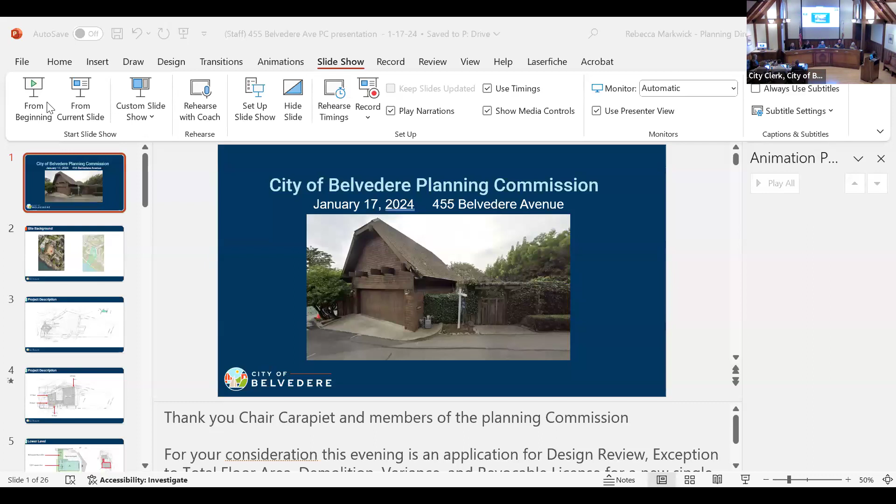Moving on to our next project, 455 Belvedere. May we please have a staff report?

Thank you again, Chair Carapiet and members of the Planning Commission. For your consideration this evening is an application for design review, exception to total floor area, demolition, variance, and revocable license for a single-family residence and attached garage at 455 Belvedere Avenue.

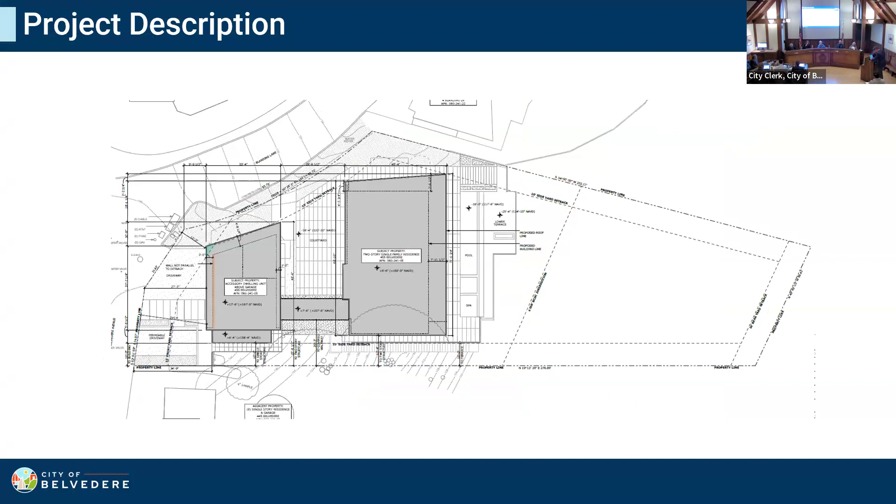The subject property is a 22,000 square foot parcel at the intersection of Belvedere Avenue, Beach Road, and Blanding Lane. In 2016, the site received approvals to demolish the existing residence, pool, and pool house. A detached 1,011 square foot, two-level garage and studio remain on the site along Belvedere Avenue. The project would demolish the existing garage and studio and construct a 5,035 square foot, three-level residence.

The residence would be divided into two pavilions connected by a sky bridge. The garage would be set back 29 feet from Belvedere Avenue and taper down to 12 feet 3 inches from the front setback at Blanding Lane. The residence would be set back 10 feet from both side yards and over 60 feet from the rear property line.

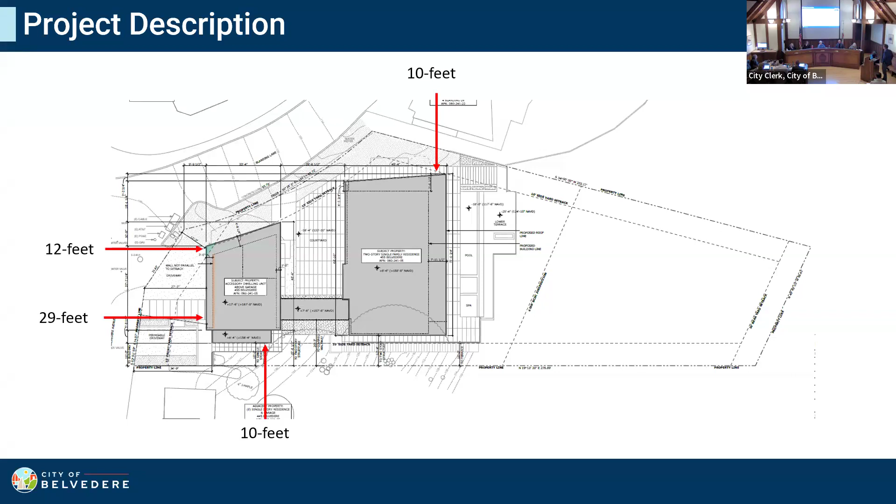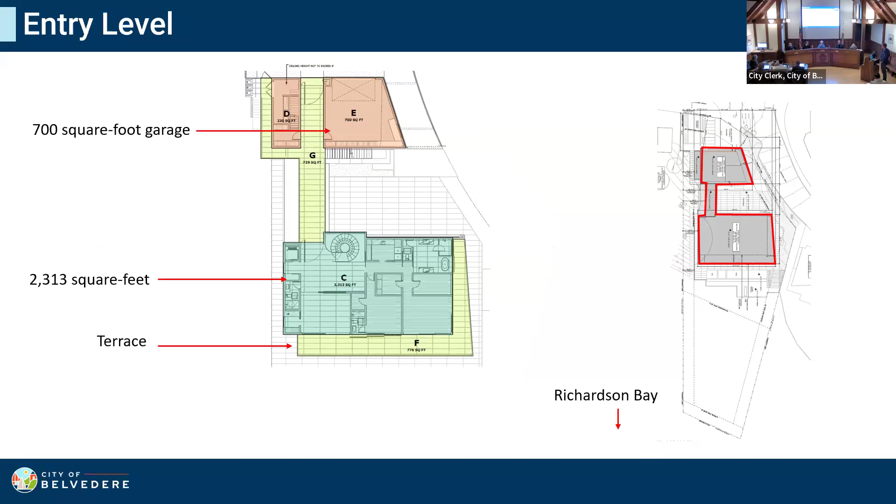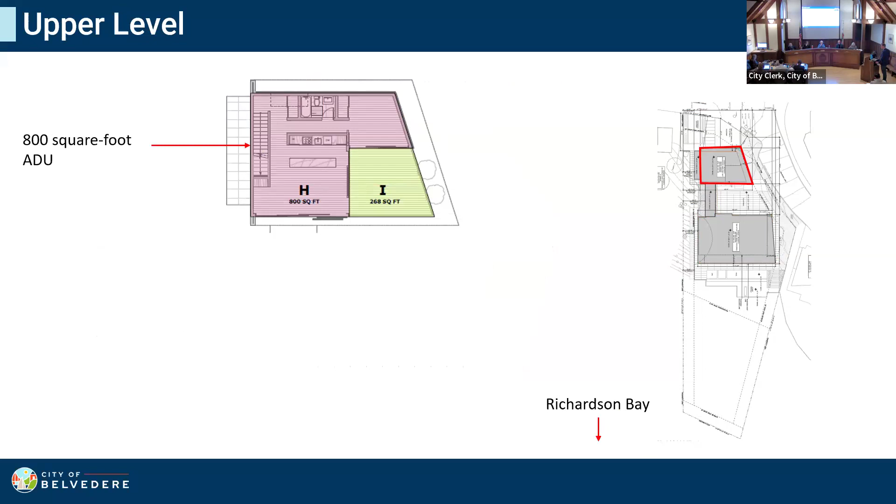The lower level of the house would include a 2,022 square foot kitchen and great room, an outdoor patio and swimming pool, and a junior ADU and open courtyard. The entry level would include a 700 square foot two-car garage and 2,313 square feet of living area, connected by a sky bridge. The upper level would include an 800 square foot ADU. The ADU and junior ADU are not subject to discretionary review and are included here for informational purposes.

Viewing the home from the west, the lower level would be set 12 feet below the curb of Belvedere Avenue, and the garage's roof would be set 13 feet above the curb level. To the southwest, the roof overhang would stand 48 feet above existing grade, and the building walls would stand 42 feet above existing grade.

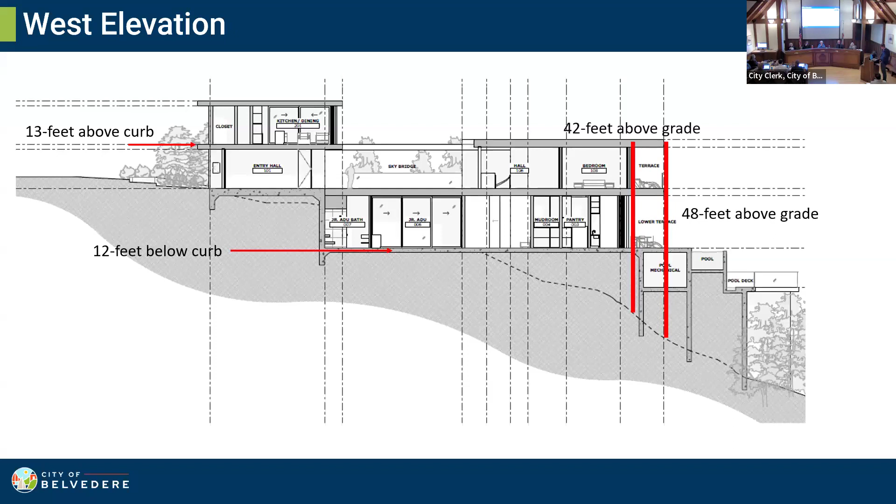The project proposes to construct new retaining walls to support the residence. The wall would reach 31 feet in height on the southwest side. The project also proposes fixed windows and doors on the west side of the residence. From the south elevation, the project proposes sliding glass doors and wood siding across the width of the residence.

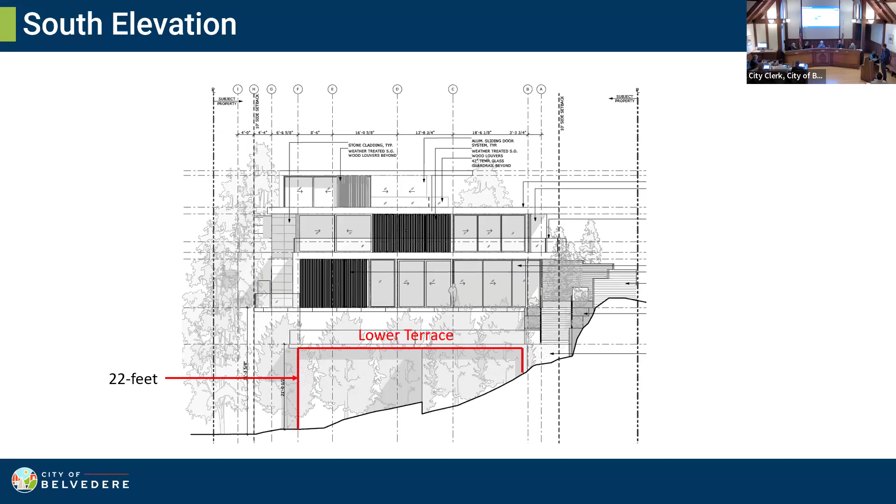Stairs will be placed on both side yards, providing access to the pool and lower terrace below. The lower terrace would have a retaining wall varying in height from 22 feet to 7 feet above existing grade. From the east elevation, the project proposes two slider doors at the entry level and will construct a new 6-foot-tall wood fence inside the property line.

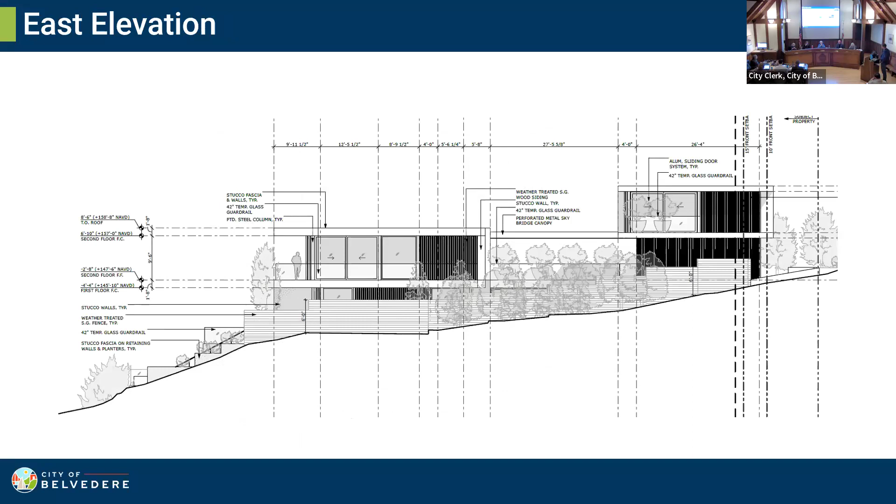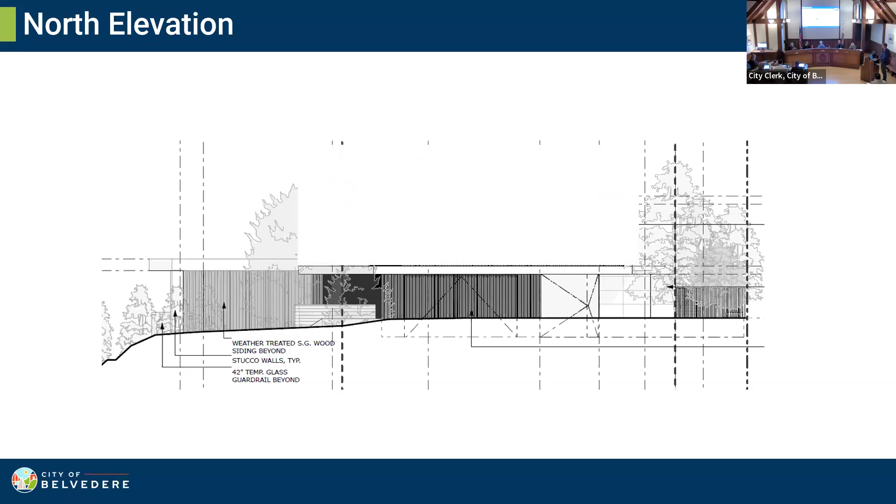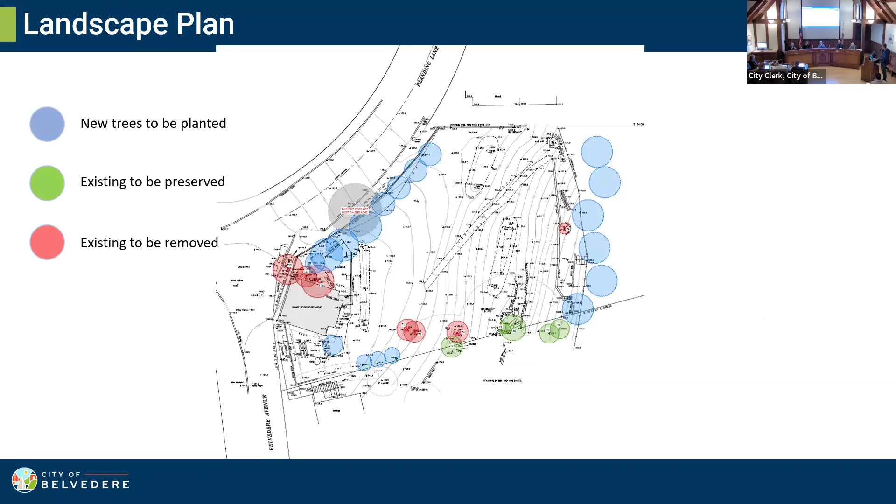The project would remove 3 coast live oaks, 2 maples, and 1 photinia, as seen in the red circles here, and would plant 30 new trees, including 6 coast live oaks to 25 feet tall at the southern side of the property, 3 crepe myrtle to 25 feet, and 4 sweet gum to 15 feet tall along Blanding Lane.

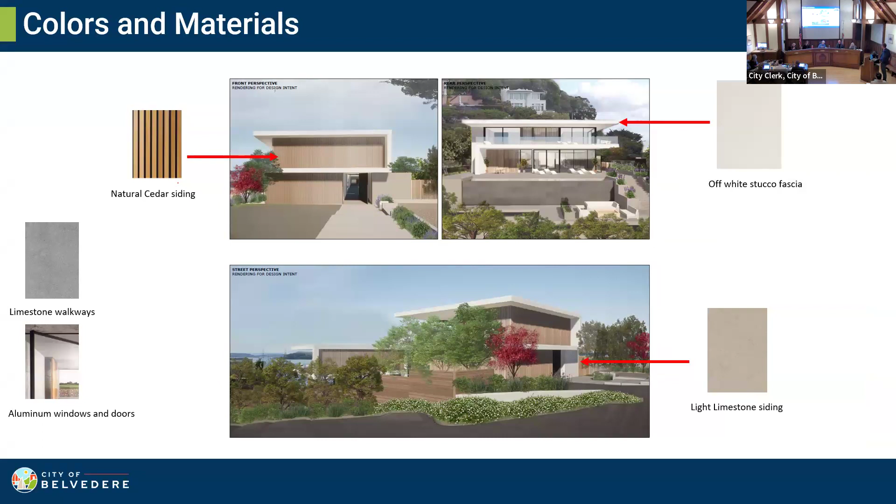The project includes a variety of exterior wall finishes, including vertical slats in natural cedar wood, light limestone, and off-white stucco. Windows and doors will be made of anodized aluminum in a black color, and the roof's overhang would be an off-white stucco. The project would construct clear glass railings, dark gray limestone walkways, and fencing in a natural cedar color.

The project proposes to excavate 1,031 cubic yards of soil, primarily from the northern portion of the site. 882 cubic yards of this soil would be redistributed to the southern portion of the site to backfill and support the retaining walls. The project would off-haul 149 cubic yards of soil from the site.

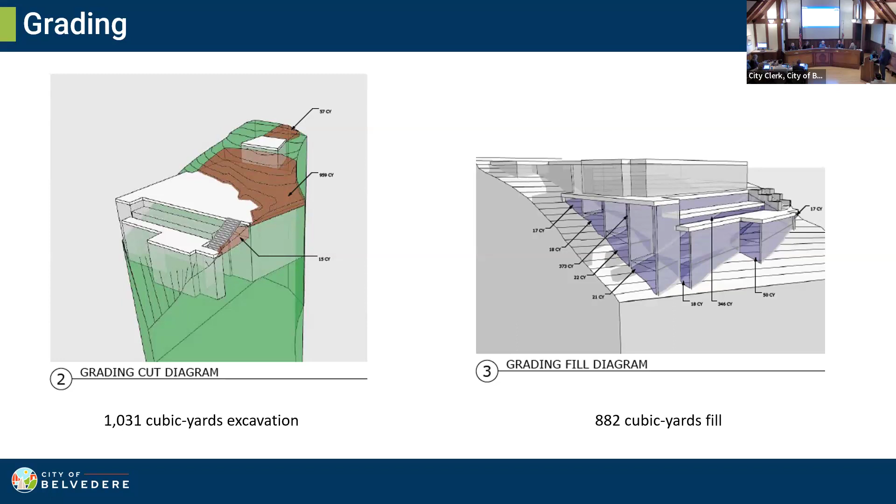The maximum permitted floor area in the R15 zoning district is 4,850 square feet for any lot greater than 14,700 square feet. Here, the applicant is requesting a 5,035 square foot residence and is required to have an exception of total floor area. Staff suggests that while many of the findings can be made, primary views from Blanding Lane have the potential to be significantly impaired.

The impact from the street would be minimized by the proposed design as well, which incorporates floor-to-ceiling windows, a cantilevered roof, and an open courtyard to provide for vantage points that would otherwise be unavailable with just solid site walls.

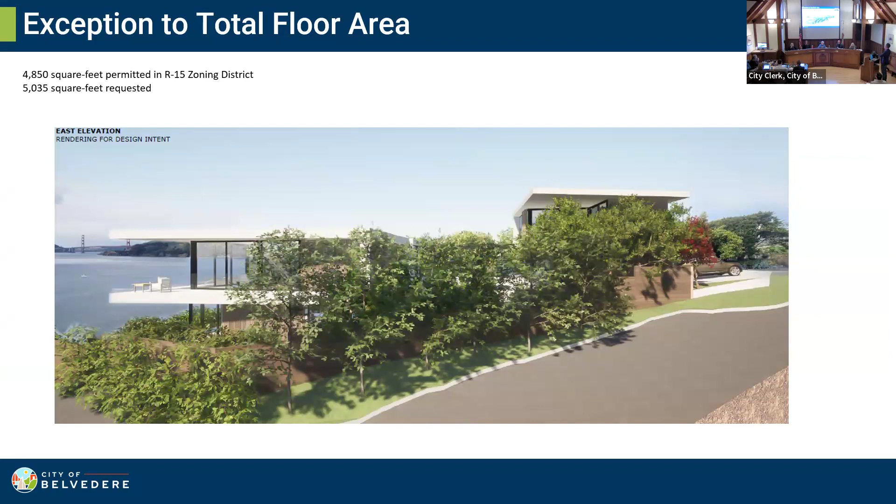As mentioned, the roof overhang would stand 48 feet above existing grade, and the building wall itself would be 42 feet above grade. The applicant is requesting a variance from the Belvedere Municipal Code to exceed the 36-foot maximum height for structures in this zone.

Staff notes that most residences in the vicinity comply with the 36-foot tall height limitation, including recently approved projects at 1 Blanding Lane and 135 Belvedere Avenue. While the site does have unusual circumstances, including a short curved front property line and steep cross-sloping topography, these do not appear to establish the factual basis for a variance, as they do not appear to be a special circumstance.

Moreover, denial of the variance would not deprive the applicant of the ability to have a 36-foot tall home similar to most other residences in the vicinity. Should the Planning Commission be able to approve the variance, staff has included a draft resolution in the attachments.

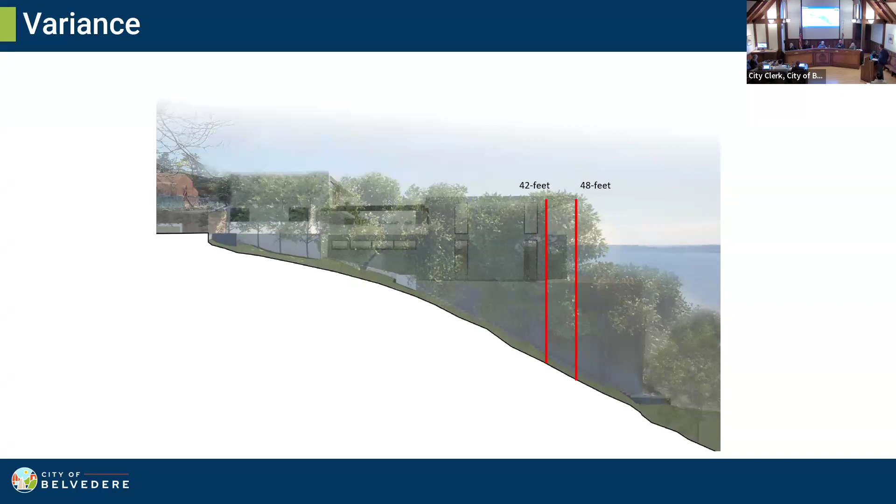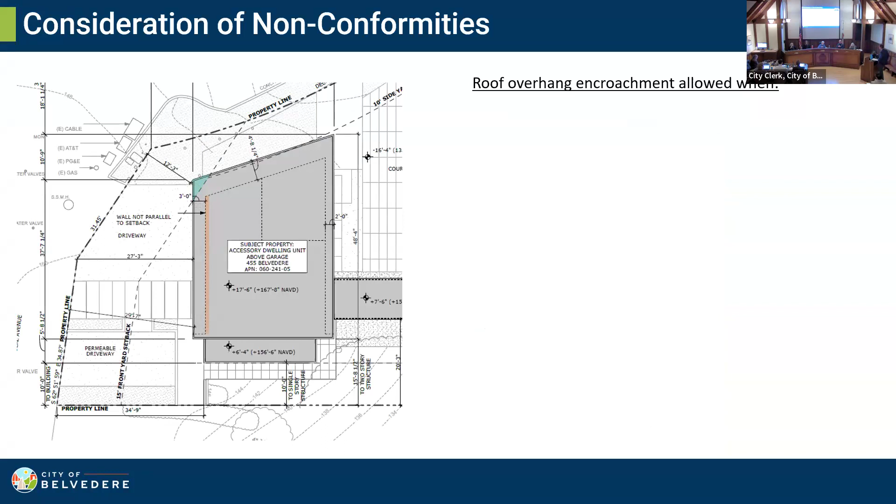The garage's roof, consideration of nonconformities. The garage's roof overhang would encroach 2 feet and 9 inches into the 15-foot front yard setback. Roof overhangs may encroach into the setback when the building wall and property line are not substantially parallel, the average depth of the setback is at least equal to the required setback, and the setback is never less than 70% of the required setback.

Here, the building walls are not parallel to the property line. The average setback is 20 feet, and the setback is never less than 70% of the required setback.

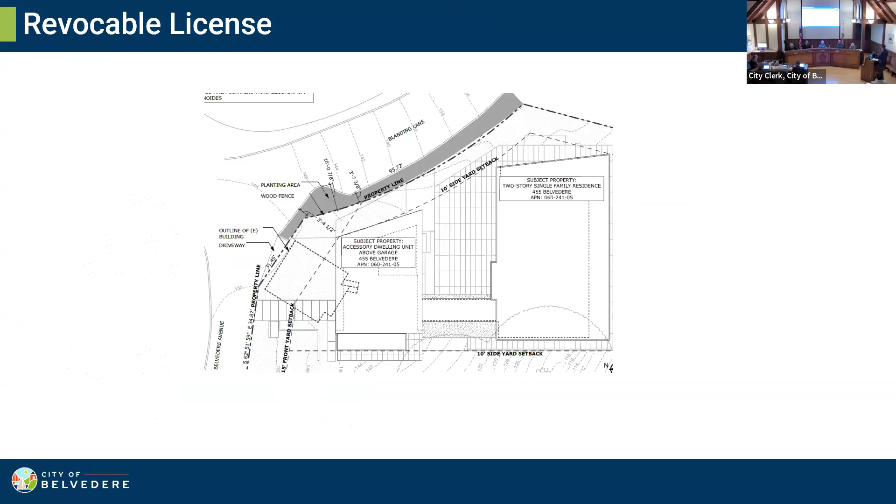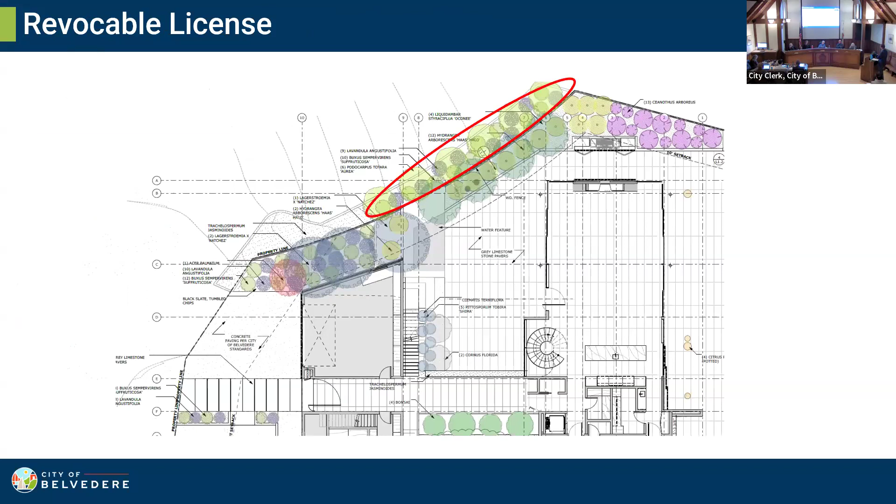As noted above in the shaded area, the applicant has requested a revocable license for improvements on Belvedere Avenue and Blanding Lane right-of-way. These improvements include landscaping consisting of English boxwood to 3 feet tall, podocarpus to 20 feet tall, and English lavender.

In 2017, the property was granted a revocable license for improvements in the right-of-way, which included landscaping. This is an image of that revocable license. The proposed landscaping for this project would be covered under that existing license.

The project would be categorically exempt from CEQA. And while staff can support many of the findings for design review, one of the findings to grant the exception of floor area includes that primary views are not significantly impaired from the street. As proposed, views from Blanding Lane will be impaired from the proposed design.

Additionally, the irregular shape of the lot does not appear to be a special circumstance to grant the variance. Staff recommends the Planning Commission review all the material, hear from the applicant and members of the public, and should you be able to be in a position to approve the project, draft resolutions have been included in your packets. Thank you.

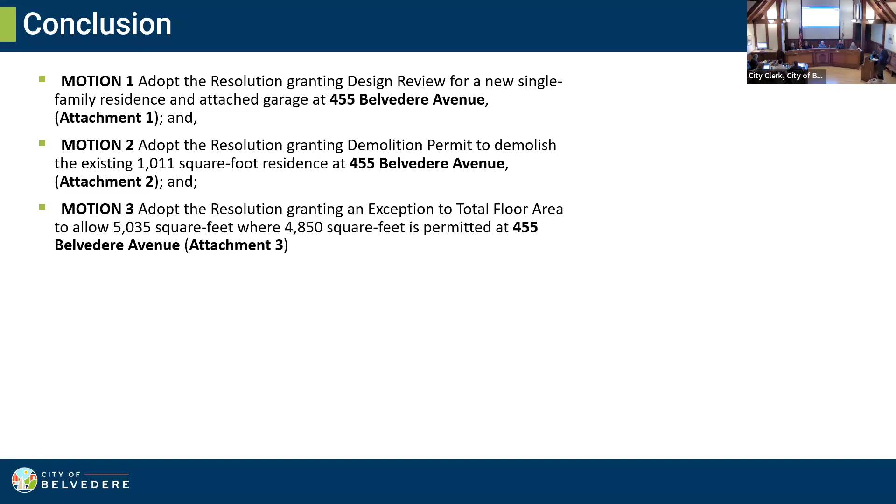I know that we have a current revocable license, and the current one includes a fence, which we no longer approve in the revocable license. So that revocable license, even though it says it can have a fence, can that be removed? I believe that this revocable license would supersede the old one, and there would be no fence. Okay, thank you.

So just in terms of the lot coverage, I want to clarify, is this being calculated over the buildable portion of the lot, or is it the entire lot? Does it include the easement? It would include the easement. Okay, and then the 5,035 square feet, does that exclude the 800 square foot ADU?

Correct, it includes it. So it's actually 5,835, including the ADU. But we can't count the ADU. Just want to clarify that. It's not inclusive of the ADU. The 5,035 does not include the ADU or the JADU. So it's 5,035 plus 800.

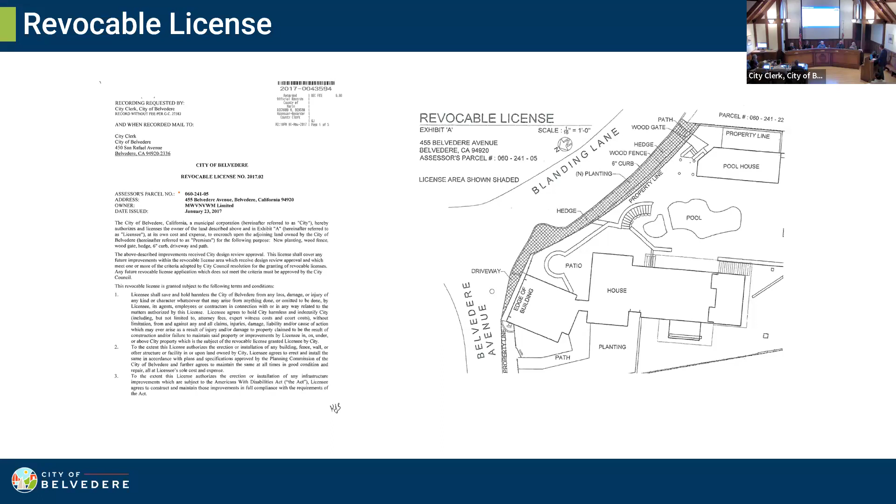I have a question. Sammy, could you pull up the photograph that showed the previously existing residence? I just wanted to look at that one more time.

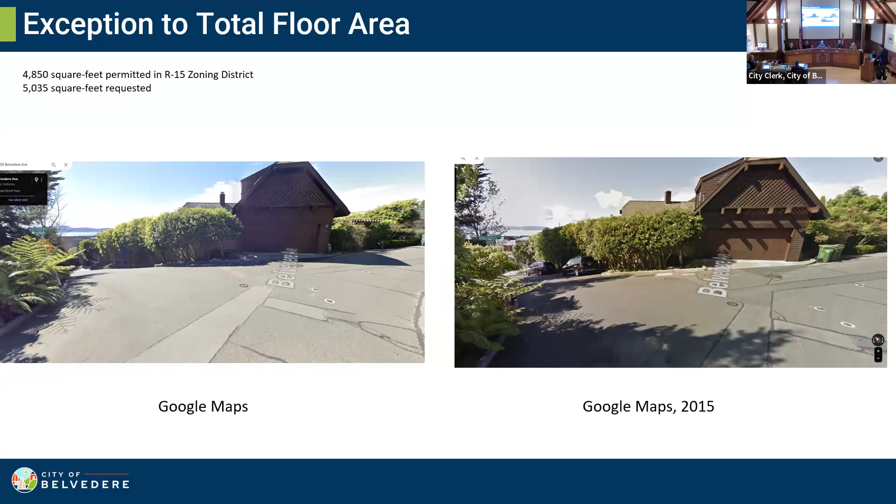Okay, we can hear from the applicant. Thank you.

Right. And Sammy, can I share the screen? I have a USB drive in here.

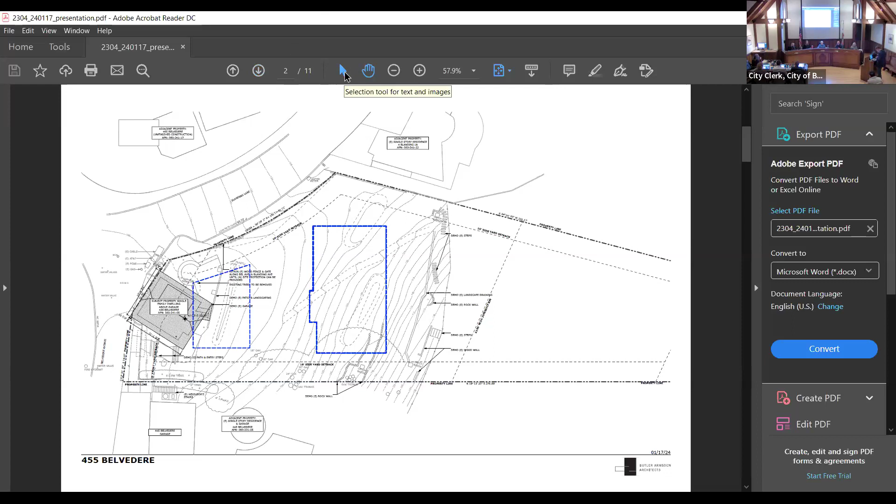Here's the proposed site plan. Where we have a tighter restriction with the first pavilion, the garage and the ADU, we're at the 10-foot setback. Where we have more flexibility on the larger pavilion, on the wider part of the lot, we've increased the setback to almost 15. That creates an additional buffer with the Gwathmey house, giving us both privacy and also helping protect the oak trees, which I'll talk about in a few minutes if I get there.

The two pavilions are separated by a large courtyard that functions as the traditional backyard. There's really no private backyard here. We do have a lovely patio and swimming pool, but we need outdoor area that's protected from the weather that comes off the bay, and that's the intent of the courtyard.

The two pavilions are connected by what we call the sky bridge, and this sets the orientation. As soon as you walk in through the gate and look down the sky bridge through the two pavilions, it sets the orientation of the house directly on axis with the Golden Gate Bridge. It also happens to be parallel to the west property line, which I think works well for the overall siting of the house.

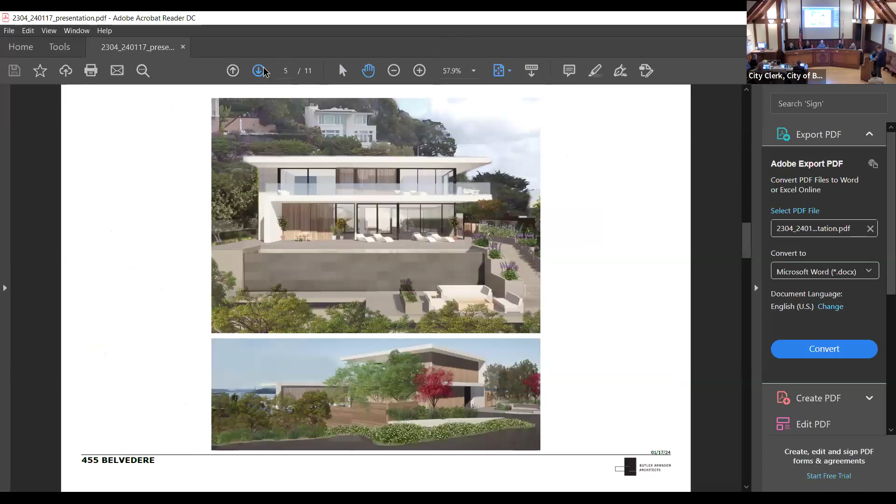We want to create a very light, floating, elegant home — a two-story home that floats above the hillside. Since we have the width of the lot, we don't have to go down as much as the Gwathmey house did on its narrower lot.

To emphasize the horizontals, we use big cantilevers and overhanging eaves as a design element. These emphasize that floating quality, but as a south-facing house with a lot of glazing, they also provide invaluable sun control — shading the house during the summer months when the sun is high, while letting the sun in during the winter months when it's low.

As Sammy described, there is a lot of sensitivity to the wonderful oak grove along the west property line. This is really the only additional defining feature of the home. It's got the views and this row of oak trees, so we're really invested in protecting them.

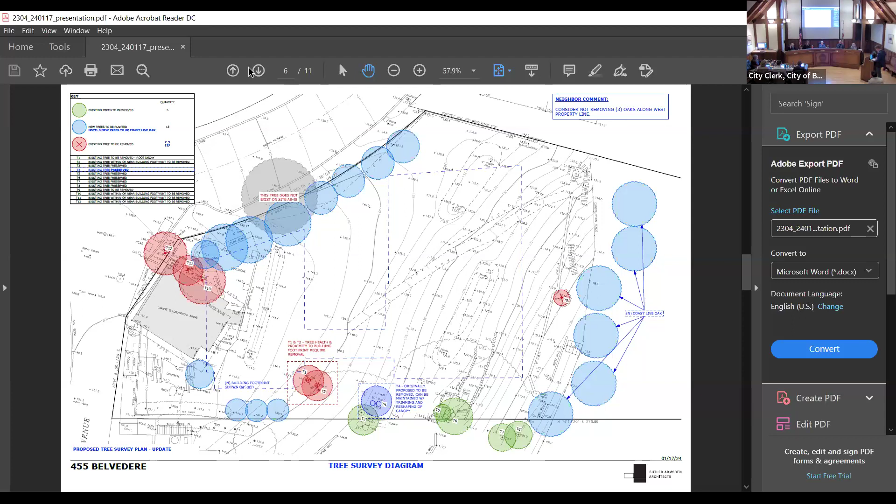A second concern that's come up is the loss of the view from the public right of way, especially for pedestrians. I don't think the story poles tell the entire story, so we're trying to describe what's going on a bit more. Because of the architecture and geometry of the building, we're actually preserving some of that view—it's not quite as massive as it appears from the story poles.

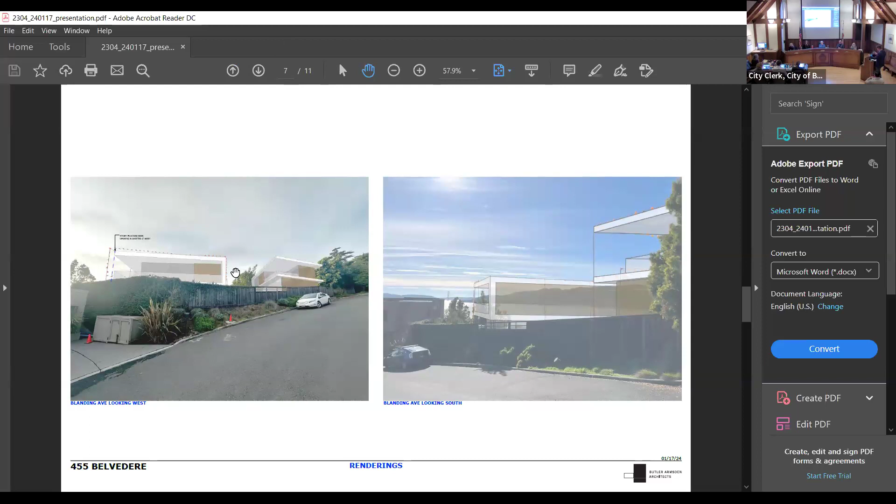We also have this courtyard element that provides a view from the street to the grove of oaks on the west property line, and vice versa from the Gwathmey house. That house can enjoy the east-facing sun that comes through the courtyard.

As Sammy mentioned, one thing to consider is what I'd call a borrowed view. There was a single-family home and a pretty high hedge on the public right of way that existed until 2016-2017. Once that was removed, and the hedge continued to be cut back, that's when the view opened up. So it's been a borrowed view for the last five to six years, and we think we're probably preserving more than what was there before.

We'd also like you to consider that by setting back the garage, on average about 20 feet, we're going to make that entire space feel much more spacious and comfortable for pedestrians and bicycles as well.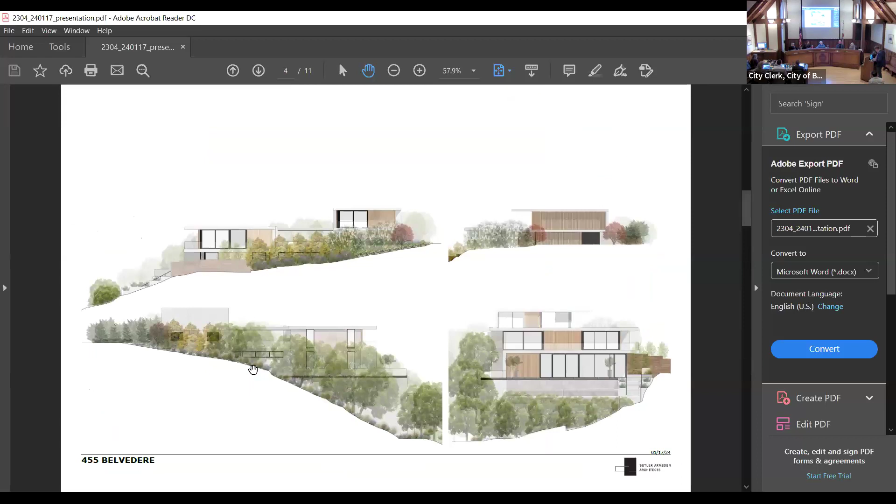I had one question. I was listening closely, but in your last statement you said that the tallest point of the eave is not at 48 feet, but actually 43 feet. I hope I said it correctly. Let me go back to the slide. The actual corner of the building is the slide to the left, which is the 43 feet. And then the 48 is to the corner, the topmost corner of the eave and roof extension. Okay, great, perfect, thank you.

Nana, did you have a question? Yeah, on your first rendition that was sent out to look at, you had a picture on page A0.10, and it shows the garage with a car in front, not a person like in our package. And in it, it looks like that car is really tilting down towards the garage door.

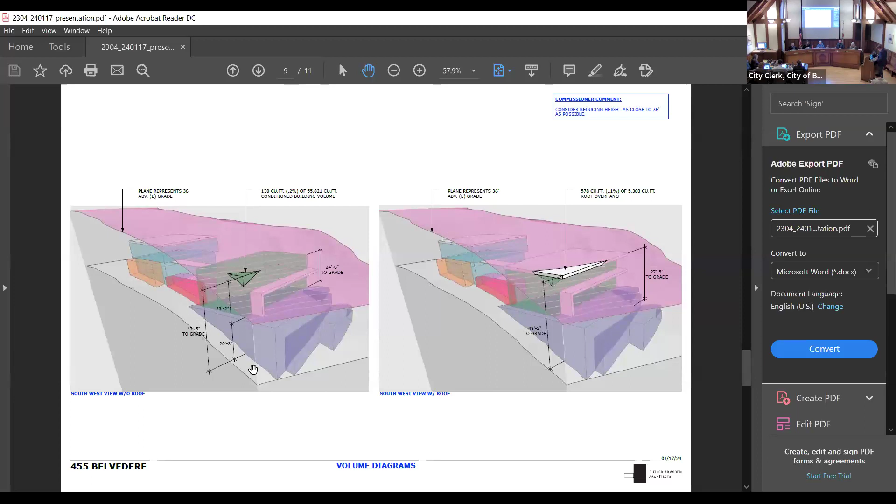I'm just wondering if that rendering is the same as we have here. Let me see, I have it back up on the screen. I think we changed the car, or is this the same car that you see? No, it's the same. But in the other photos you have in the package, it looks like there's a person in front and the driveway looks parallel, like it doesn't sink down. Good observation, there might be conflicting renderings. The actual rendering that's correct is the one with the car tilted, because we have a difference of about 3 feet from the street down to the garage. So we are trying to step down with the hillside starting at the garage.

Okay, I walked around today waiting for the sun to be at the perfect angle, and I took the liberty to go in through the gate a little bit to make sure the proposed garage is actually that much further in. If you stand on the northeast corner, more or less where the gate is, the removal of this garage, which has not been mentioned, actually opens up—yes, you are taking a borrowed view that pedestrians have had for the last 7 years, but by removing this garage you're opening up an enormous window of the San Francisco skyline. That has not been mentioned, and I really walked around and looked and took pointers. As long as your proposed planting on the revocable license part going down Blanding Lane is not overly planted or tall, you give the pedestrian, if they walk on the outside of Belvedere Avenue, a sweeping view of the San Francisco skyline. I thought I'd just give you that.

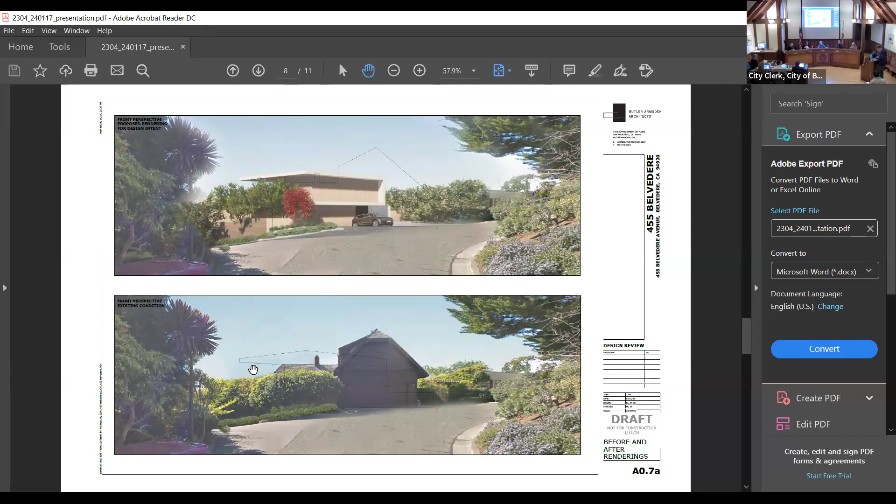Commissioner Seidel? Yeah, the packet we received says there are 5 parking spaces proposed. Can you clarify where the 5 are? I see a 2-car garage, I just wasn't sure where the others were. Oh, there's one on the side. It is 2 inside the garage, 2 in the driveway just directly in front of the garage, and then 1 here kind of on the side. Got it, thanks.

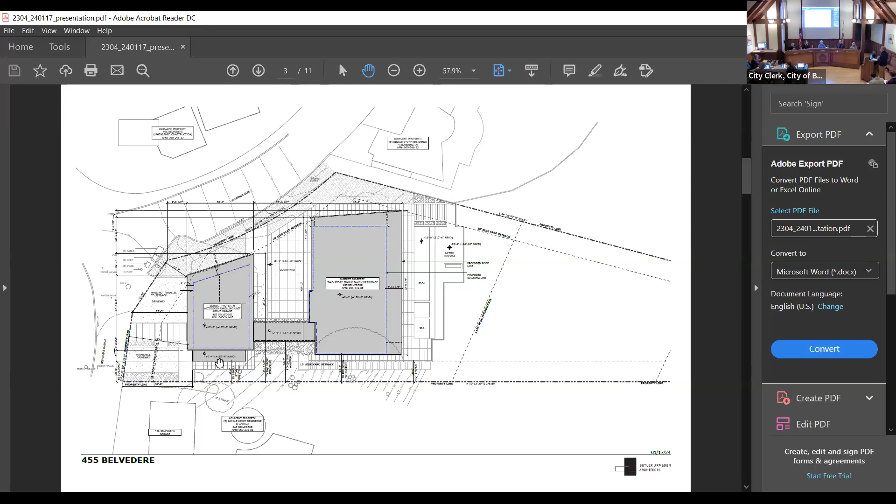Good evening, everyone. Armand Atkins, part of the ownership of 445 Belvedere, the home to the right. We want to be good neighbors. We previously owned 455 and we are pro-development, so we want this.

Our issue is with Pavilion 2. It's the height and where it projects out closer to the bay, where it obstructs our view. It will negatively impact our property value, our privacy. It creates a wall for us.

Their initial package, page A0.02, is the only document that shows the relationship of our two properties, and you can see how 445 is tucked back. What I did today is I took some photos and shared it with the group of where the story poles are relative to our backyard, relative to our views.

It blocks San Francisco. It blocks Alcatraz. It blocks a good percentage of what we find valuable in our home and what the market would find valuable in our home. It would be detrimental to us, and so I'm here to object to the height variance.

This is a lovely home. If the courtyard was shrunk and it was tucked back a small bit, if the height did not have to be as tall, we would love to support this project 100%. But as it is, it's a harm to us. If you have any questions about the story poles, the photos are self-explanatory of what would be blocked. Did you see the photos?

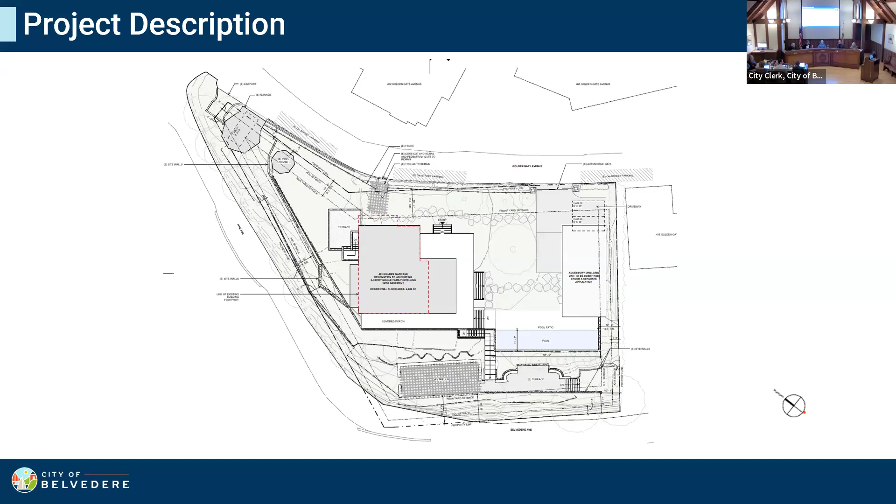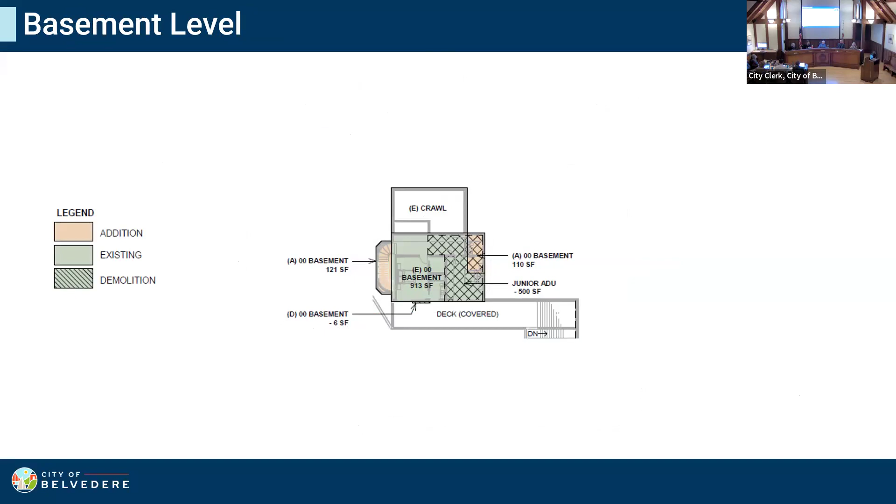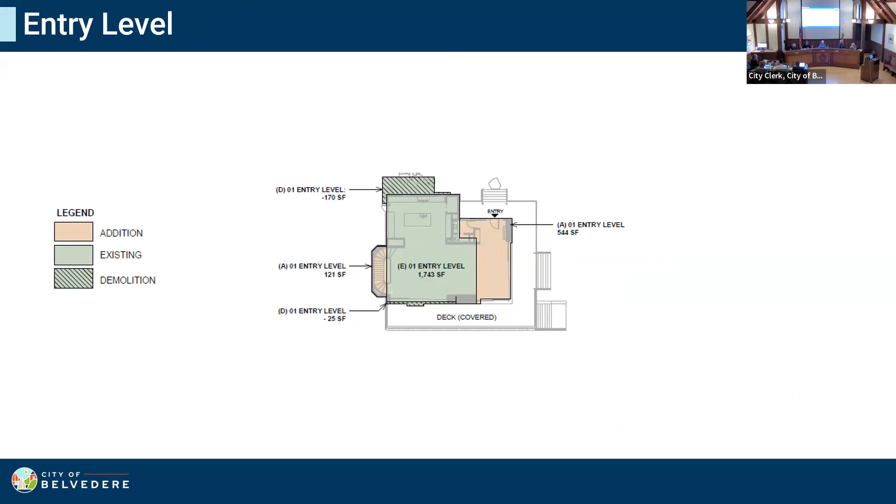The project would also construct a new deck, covered porch, windows and doors, siding, swimming pool, pool patio, and outdoor terrace. At the basement level, the project would add 231 square feet, including 121 square feet for a spiral staircase on the western side of the residence. The new staircase would continue through the entry level, and a 544 square foot addition would be located on the eastern side of the house. The new staircase would travel to the upper level of the home, and an exterior deck would be placed at the eastern side above the entry-level addition.

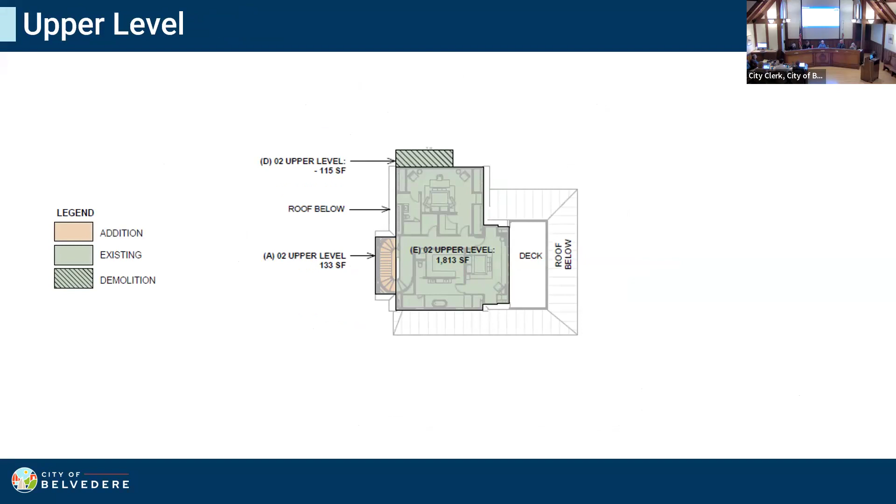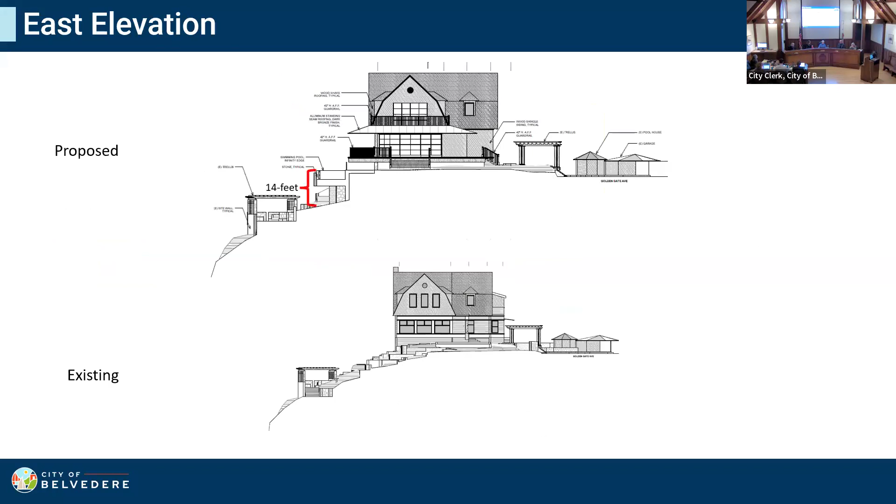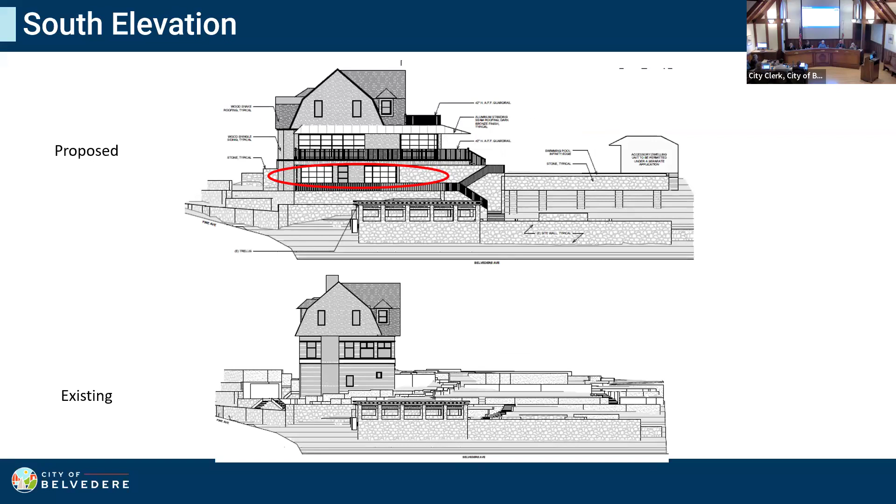Exterior stairs would provide access from the entry level's courtyard to the basement level, circled here in red.

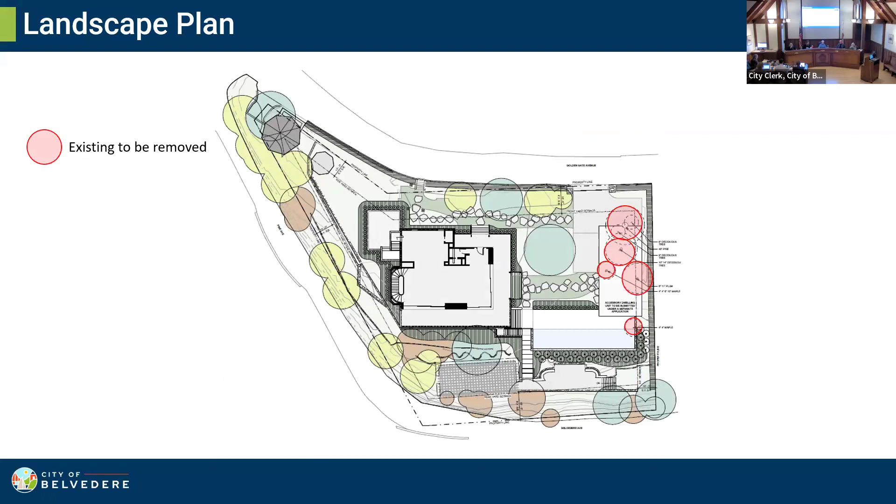Landscaping: the project would remove 8 trees from the eastern side yard, including one 40-inch diameter pine tree. The project would plant dwarf strawberry to a height of 12 feet below the infinity pool, and dwarf pittosporum around the house and courtyard to 4 feet tall.

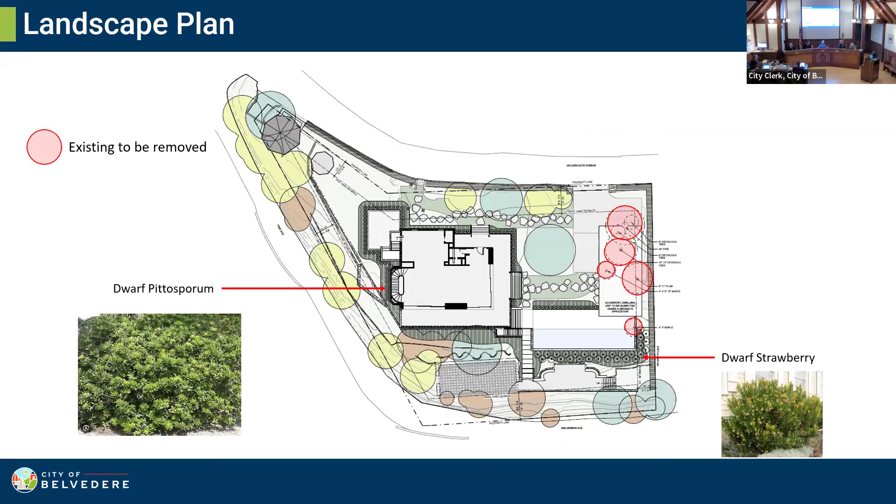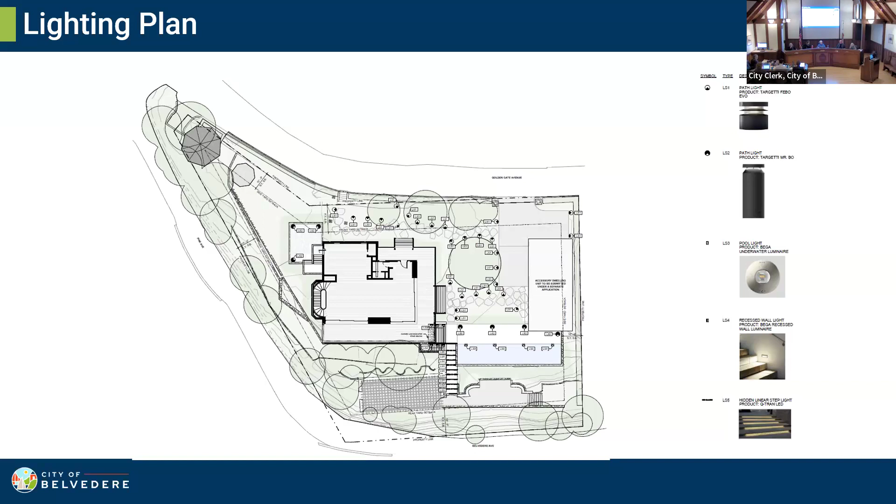The project proposes a variety of exterior lighting, including path lights, recessed wall lights, step lights, and underwater pool lights. The applicant may want to consider an alternative to the proposed stairwell lights to reduce the light exposure.

The project proposes dark bronze windows, doors, and guardrails, cedar shingle siding, clear cedar decking, concrete side stairs in a Mesa Bluff color, and a standing seam metal roof in a dark bronze color.

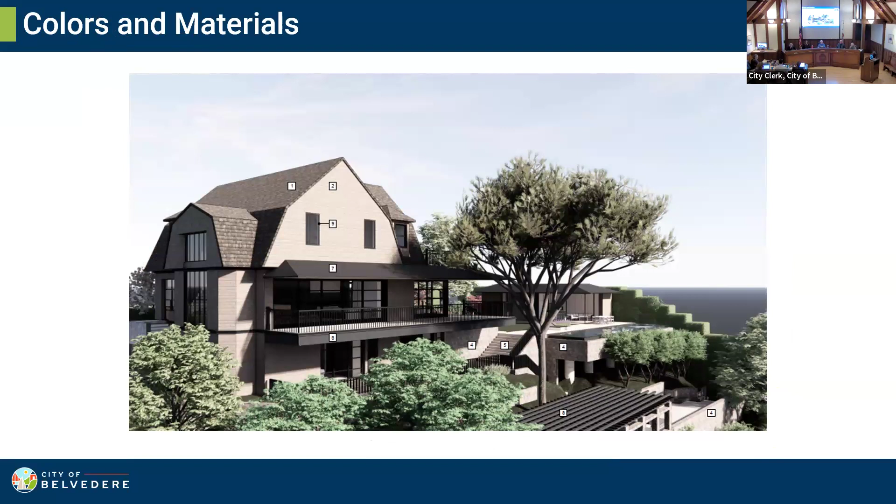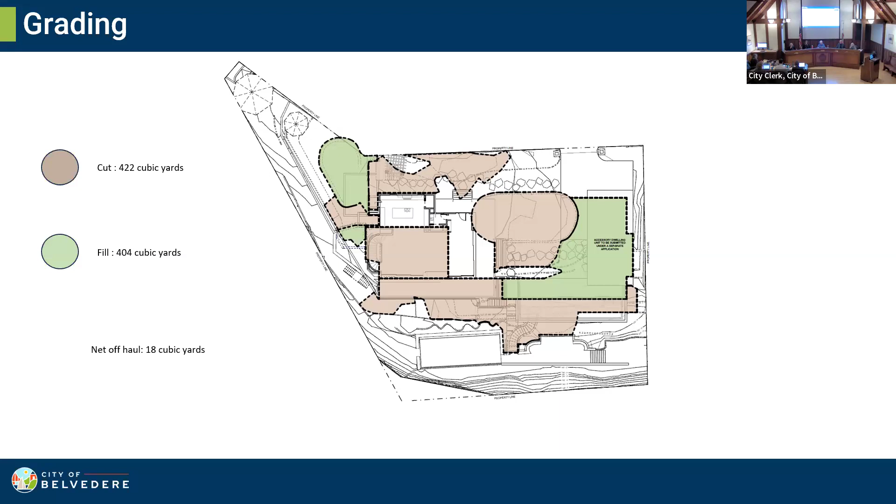The project would excavate 422 cubic yards of dirt and redistribute a majority throughout the courtyard and existing swimming pool, for a net off-haul of 18 cubic yards of soil.

The residence currently encroaches into the 15-foot front yard setback. The portion that encroaches would be demolished to bring the residence into conformance with municipal code requirements. A 2001 revocable license was issued for the property to allow portions of the existing carport, garage, fence, and driveway apron on the public right-of-way. These improvements will not be altered as part of this project.

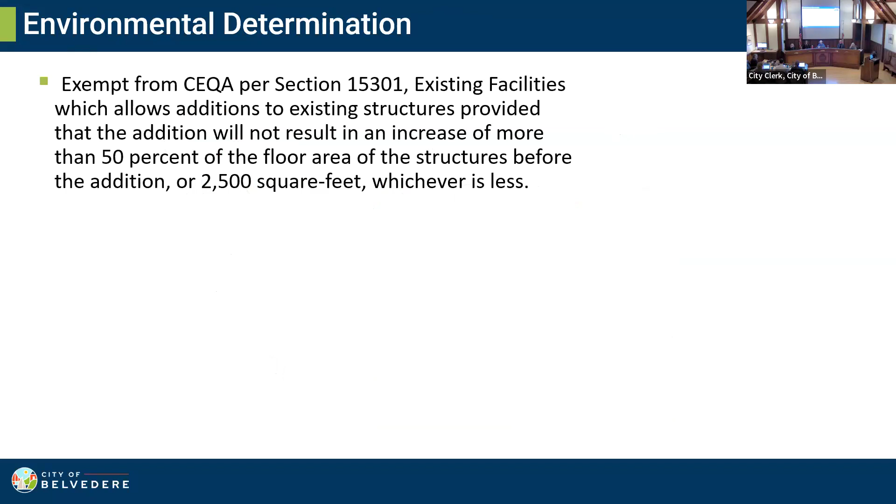The project is categorically exempt from CEQA. As detailed in the resolution, staff can make the findings for design review and recommends the Planning Commission adopt the resolutions attached. Thank you.

Thank you, Sammy. Any questions for staff? Okay, quick question. There's a terrace in the front.

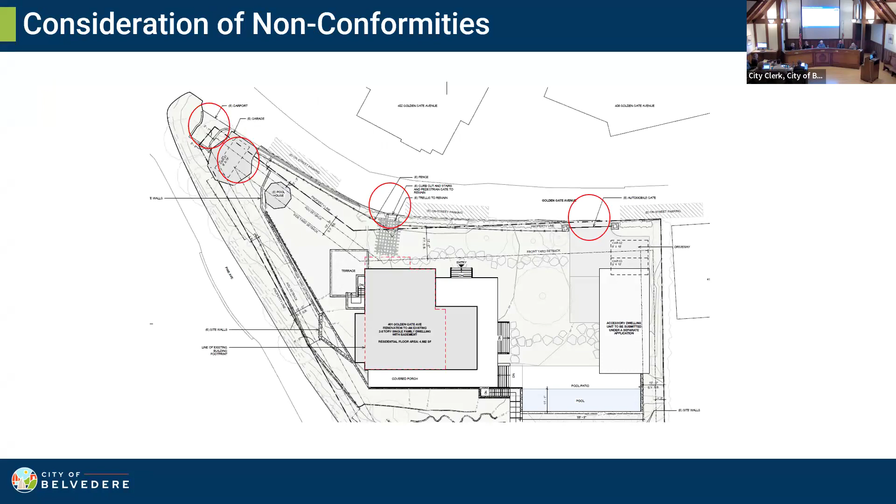Is that allowed to be in the front yard setback? Terrace, sorry. My understanding is that's new. If it's at grade, then... is it though? It's a ground planter. Got it. So it's not elevated, okay. Thank you.

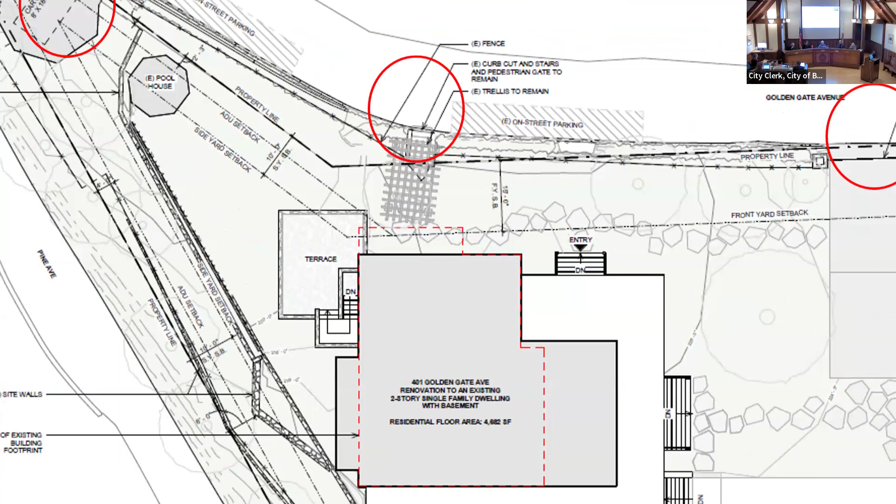I'm Jeff Dorso, the applicant and owner's rep on the project, and Alpna Gupta is here with me, who is the architect for the project. So we're going to tag team this. Our hope is not to repeat Sammy's presentation. We'll try to focus on some of the issues that have come up with the community, the commissioners, and staff, and then leave most of our time to answer questions you all may have.

As an initial matter, I want to start by thanking staff, the city, and the commission, along with our neighbors. I think the process has led to a better project. We've had great feedback from staff on how we can reduce off-haul, and input from the commissioners and our neighbors, even on how we set back certain elements of the project to ensure the trimmability of some of our landscaping and other things. So we're really thankful for that and happy to be here before you tonight.

A couple of elements came up also through that process. One was the setback question, which just got answered, so I don't have to address that.

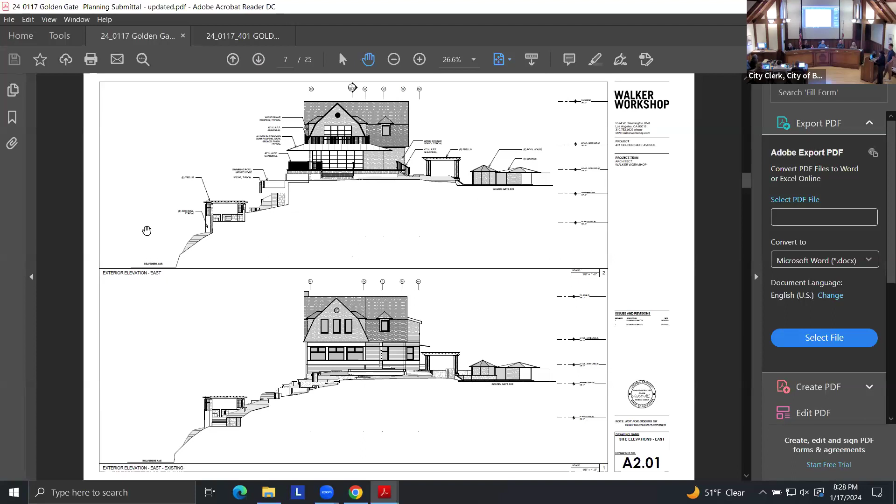On this elevation, the lower portion shows the existing facade. Again, we're trying to clean up that facade by locating the stair core there, with this primary central space opened up with glazing to look out onto the primary view. This was brought up during one of the site meetings, so I have an exhibit showing how we're planting trees in front of that glazing to provide screening, as well as the lighting levels within that space. We typically like to light our stairs with very low level dim lighting and integrated handrail lighting, so we expect this to be a calm, serene space that doesn't intrude on the neighboring properties.

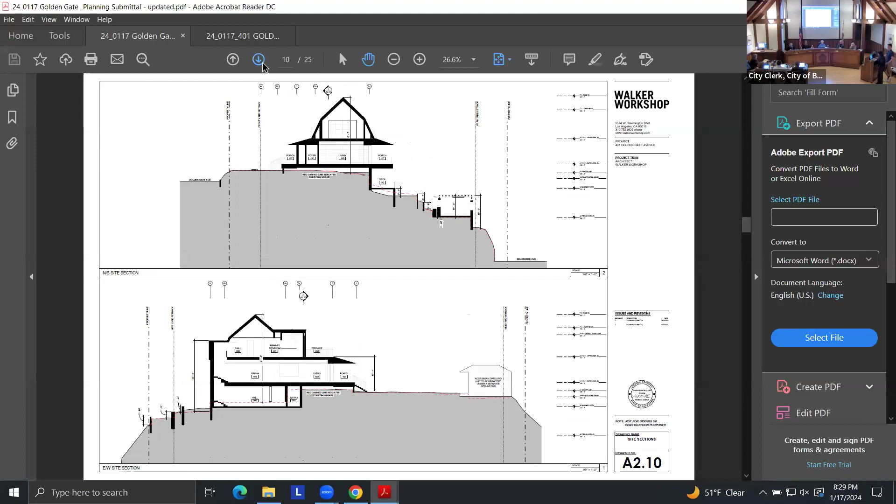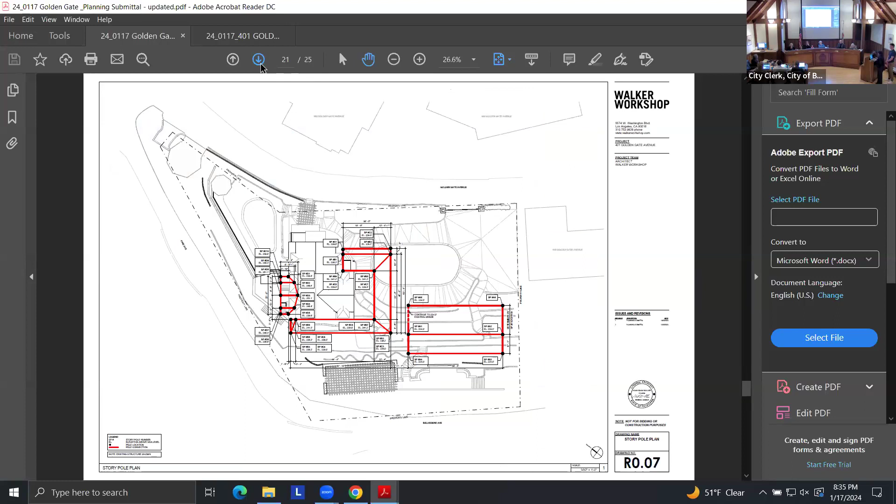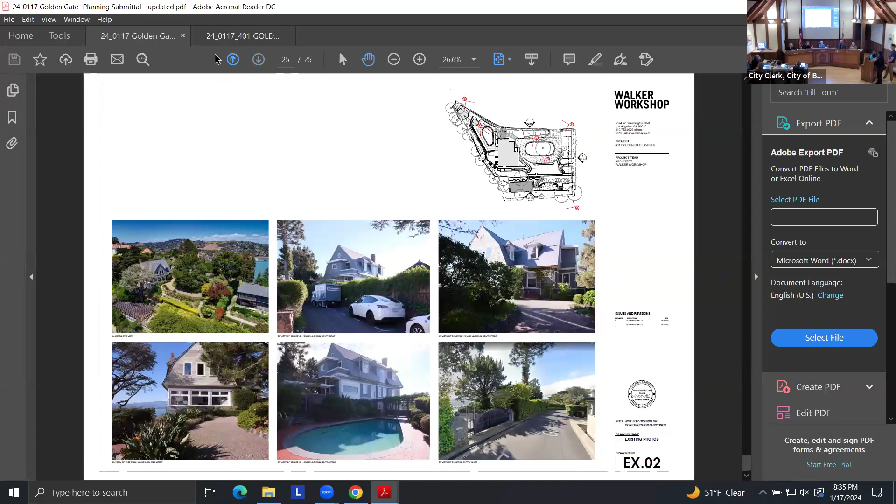Thank you for the time. I think that's it, sorry.

Thank you. Does anyone have questions for the applicant architect? Yes, I have a few lighting questions.

What are you proposing to have in the ceiling of your roof, over your breezeway or walkway all around the house? What do you have under there—any lighting, or are there lights on the house lighting up the deck underneath?

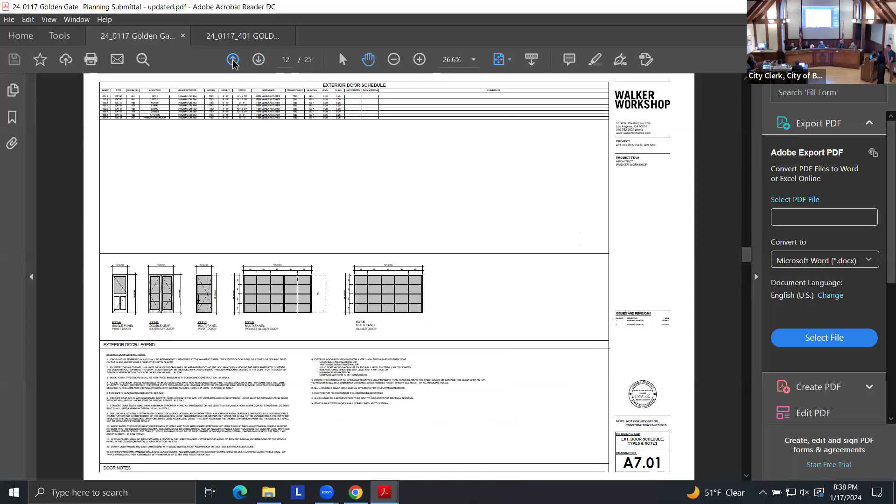Also, the path light, the Targetti, the Mr. Bow—you have it in the catalog. Unfortunately I had to go look it up; it would have been helpful if those details were included here. They come in different sizes—16 inches, 14 inches, 41 inches—and they vary quite a bit, flat top or angle top. It just gives the maker's name here.

For those, we're planning on using the shorter ones, the 16 inch, flat top, the one shown in this drawing. And the same for the little one? Yes.

And that top on the Mr. Bow can't be adjusted? I'll have to look into the details for that.

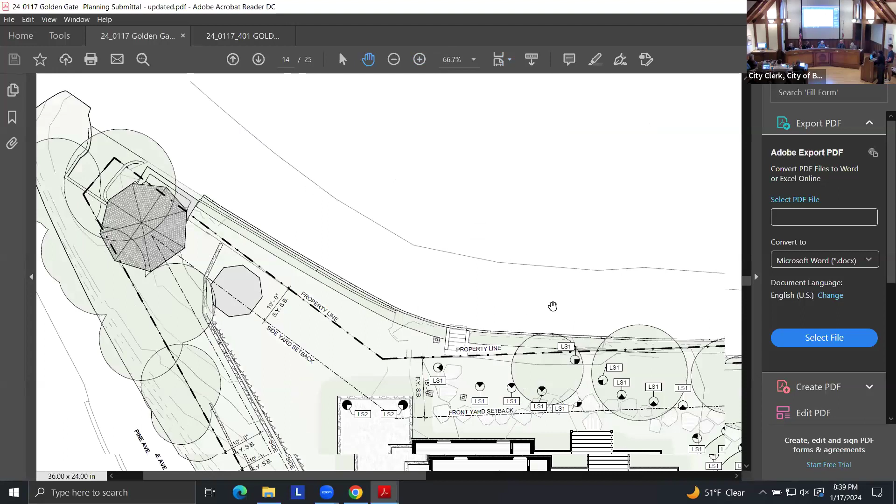Also, I didn't understand what you said about the strip lights under the stairs going down to the party center—you said you're going to shrink the width of it? On the plans that were submitted, those stairs were running the full length of the tread. In this latest scheme, we've pulled that back from either edge to provide a shadow line, so now they're 3 feet wide, intended to just light the clear path as you're walking down the stairs.

Could you imagine doing it every third step instead of every single one? Yeah, I think that would be fine. Or put it on the side so people below on Belvedere Avenue don't see the staircase lit up from below. Okay, that was it for lighting for me.

Somebody else had a question—Ashley, is that you? For the glass wall up by the staircase, is that going to be tinted glass? We've specified a low solar heat gain coefficient glass as well as a low U value glass, so it has minimal light emittance on the inside, but it's not actually a shaded glass, if that's what you're asking.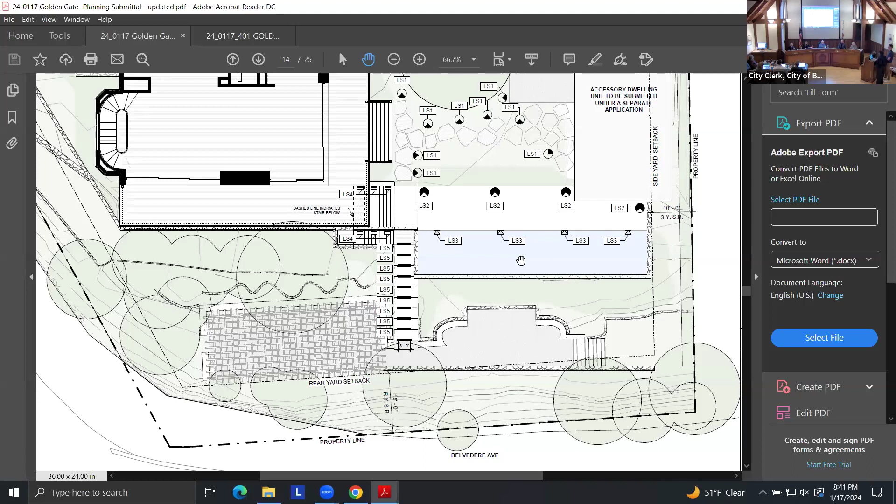So it's clear? Yeah. Thank you, anyone else? In that glass wall there—that's the staircase, correct? Yes. Okay, so what kind of lighting are you going to be using there?

In the staircase? Yeah, so here we're looking at these wall sconces on the interior—these are all interior lights. Oh, I don't have this page. This was an exhibit we just prepared. Oh okay, I was looking for it trying to see what it was saying—so those are interior lights? Yes. Oh, I thought they were external. Okay, all right.

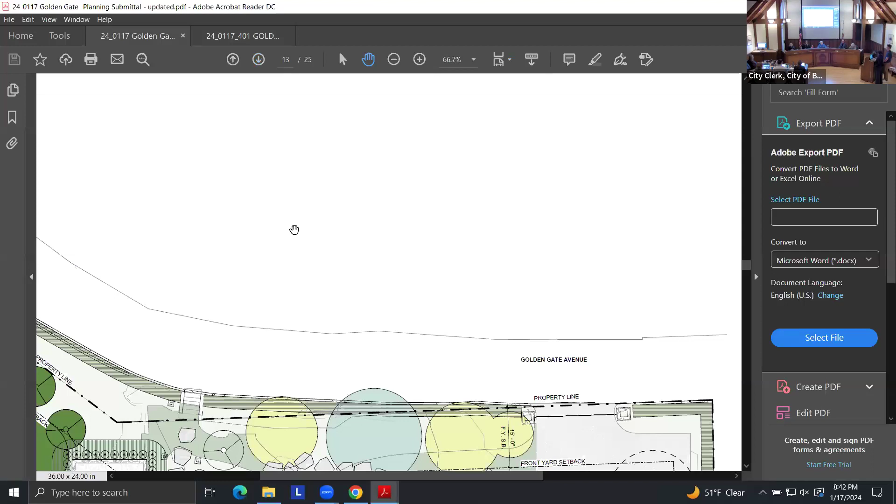So I just want to clarify, because this is very important: roughly you're cutting 400 and some cubic yards, and you're not going to off-haul any of that except for 18 cubic yards. So you're going to keep all the 400 cubic yards of dirt on site during construction and use that for your fill, for your retaining walls. And you're only going to off-haul 18 cubic yards, which should probably be about 2 dump trucks. Is that correct? Yes, that's the intent.

So when you say that's the intent, what does that mean? Does that mean it could change? No, that's what I was clarifying. Okay, all right, I just want to make sure it's correct.

So I would recognize staff for helping. Initially, the off-haul was much greater and we worked with them on ways to help, with Altman's team, because we're mandated by city council to watch that. That's why we want to make perfectly clear where we're at. So that was a conscious effort, and one of the improvements I think we're able to make.

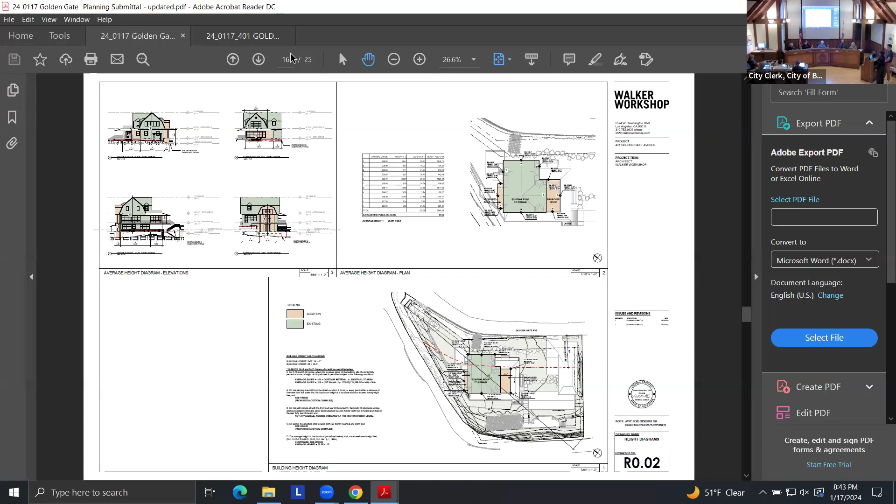Okay, and then I did have one question on page RO.08. This is, you see it a little bit in your other plans, but this gives it a little clearer: underneath the pool, you're supporting that with big round concrete pillars, like on a freeway ramp.

Yeah, on piles. And those pillars can be seen from the street. Well, as you see them here, right in this, yeah, we are planting in front of those with the dwarf strawberry. Can you bring up the dwarf strawberry? This is a concern for ownership because the primary outdoor gathering space is actually right below the pool. So screening those caissons so that you have a nice green screen there as you're going up the steps, it's like a primary path of travel.

We want to make sure that's not visible on our property, first of all. And then there's quite a bit of the property below that. I'm not certain whether it's visible or not from the street, given the angles, we'd have to go check that. But notwithstanding that, from just the property, from our perspective, it's important that gets screened because that's one of our primary outdoor gathering spaces.

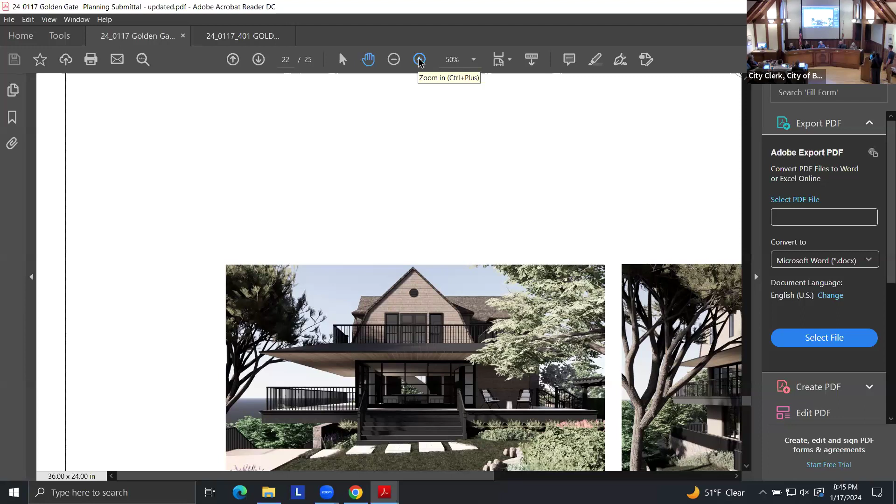Okay, because we had one other project that we approved with those freeway on-ramp pillars, and we were told never to do that again. So the screening on that's going to be very important.

And then let's see, what else did I have? I know we can't talk about it, but I'm going to ask, and I don't know who should be the person to answer, if it's staff or the applicant, but this also has a JADU that they're installing, and they're going to deed restrict it. So I get that. What are they deed restricting it to? Have they, when is that? How does that work?

Anne? Rebecca? I was just going to say that I was not aware of that component of the project. However, normally it would require a unit be rented only to people affordable to a certain level of income.

Right, so there's, as we all know from the housing element, several levels of affordable housing - moderate, low, very low. I would have to defer to planning staff on that. I have not talked to the applicant about the deed restriction, but I think in order to get that JADU, it has to be deed restricted to low or moderately low, and that's up to the applicant.

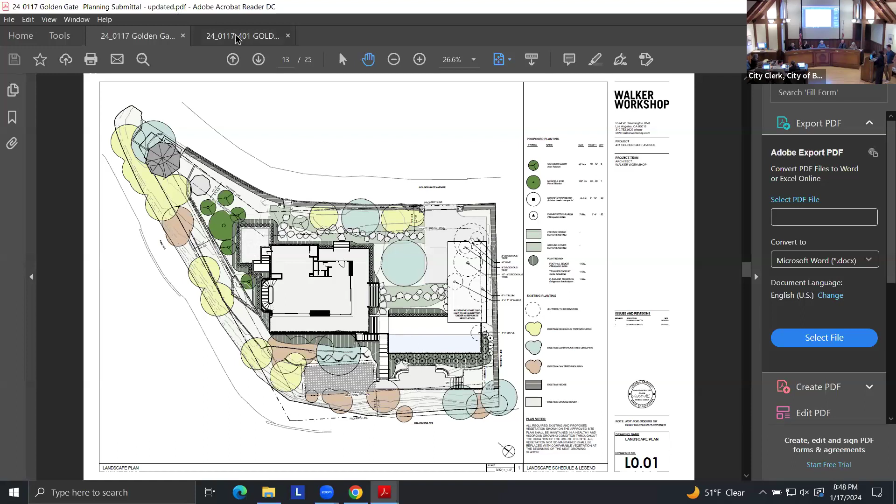I still have one more lighting question. You showed the handrail on the sheet of paper we saw here. Do you see having that light in the handrail continuous, or is it just where they have their bigger poles that secure it to the ground? Or where are you intending to put the light in the handrail?

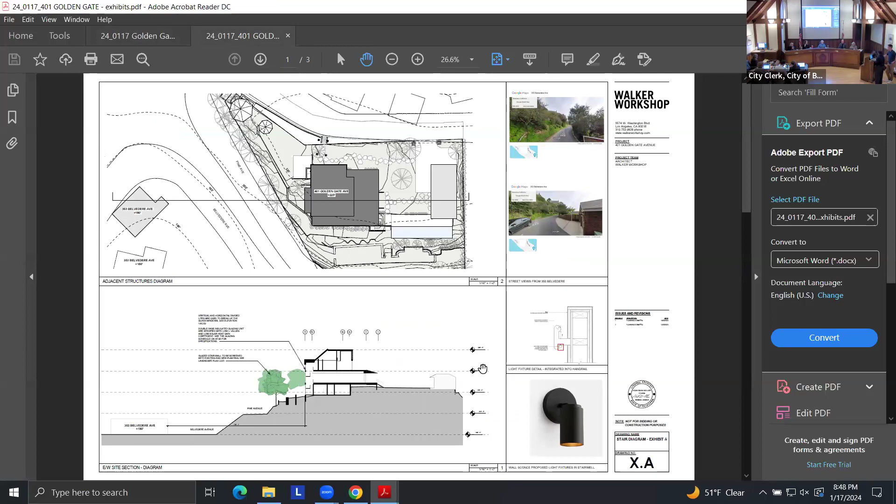That would be continuous on the interior only, on the interior stair. Shielded, yes, that's a detail around it. So it would be located on the handrail inside the house in the stair core, and that's the only location. Oh, in the stair core.

Yeah, these light fixtures on this sheet are trying to exhibit the low minimal lighting that we're planning on using at that stair core, because we understood that was potentially a concern. Oh, that would have been a good sheet to have, because I thought it was outside lighting. That's why I asked. Confused. Sorry for the confusion. No, that's okay, it's good, we got it figured out. It was two different lighting circumstances. We were trying to show the reductions in the front stairs.

So on the topic of minimal lighting, I think the lighting you're proposing for the ceiling of the roof over your walk around—those recessed lights will be seen by anybody down below on Belvedere Avenue and on the little Pine, because when you look up from below, you'll see all these lights. So it would probably be better if you had lights on the house instead.

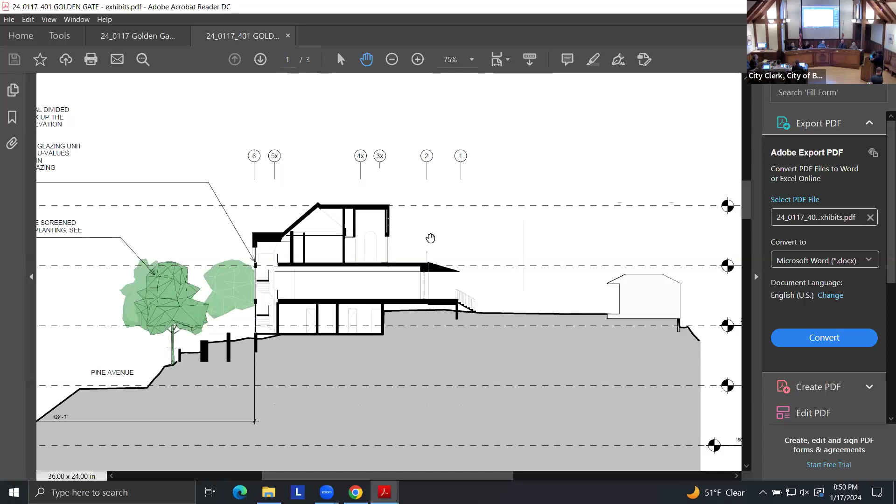this is a beautiful old home, and like Nana said, it has really good bones. I think these are really thoughtful and sensitive changes that will make it more modern and livable. I think it absolutely makes so much sense to shift where the living area is happening, add that central living area, move where the pool is, and shift the direction of the home, because you're really missing out on so much with where things are placed now.

I'm generally very supportive of the plan. As we discussed, my one concern was really just that glass wall and light pollution. I do appreciate that the tree has been planted there, and I'll be interested to hear what others think about that wall. It's a nice detail, I think, from inside the home, but I do wonder about the size of it from the exterior.

And then it looks like we had discussed just a 1-for-1 tree planting plan when I was there, so it looks like on the new plan, that's what you're doing. I wasn't totally clear if you're taking some of the trees that are there now and moving them, or if it's just the one tree that you're moving. But regardless, I think we want at least one tree for every one that's being taken out.